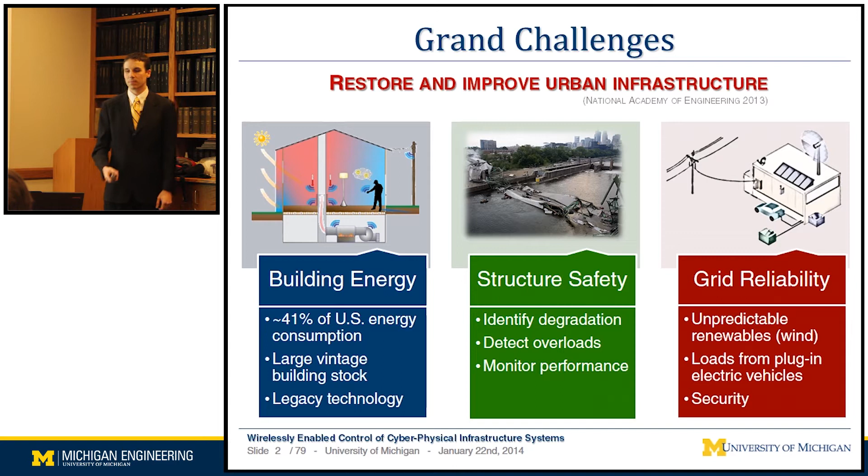One way we can tackle these problems is through enabling technology on three different fronts, all of which are exhibiting some sort of Moore's law behavior—rapid or exponential improvement in metrics with respect to these technologies. In wireless networking, it enables a flexible topology that we can communicate in a very flexible way, and the main improvements have been in creating low-power devices.

And they can fit in small integrated circuits, so we can drive the communication as low down into the physical system as possible. With respect to embedded computing, main improvements have been in creating low-power real-time computing devices that are fitting very small, so we can fit entire systems on a single integrated circuit.

Then lastly, there's two fronts in portable energy. There's energy harvesting with respect to solar and vibration, where we're seeing dramatic efficiency improvements. And especially with respect to batteries in energy storage, we're seeing very impressive improvements in energy density by other researchers that are coming to commercial viability.

So how do we apply these enabling technology trends to the grand challenges? Wireless networking enables us to track people throughout a building and create personalized environments, so we're creating an efficient control system right around the person. That requires advanced controls that really leverage the embedded computing. And then lastly, with portable energy, we can increase the sustainability and put dense sensor distribution throughout the entire building.

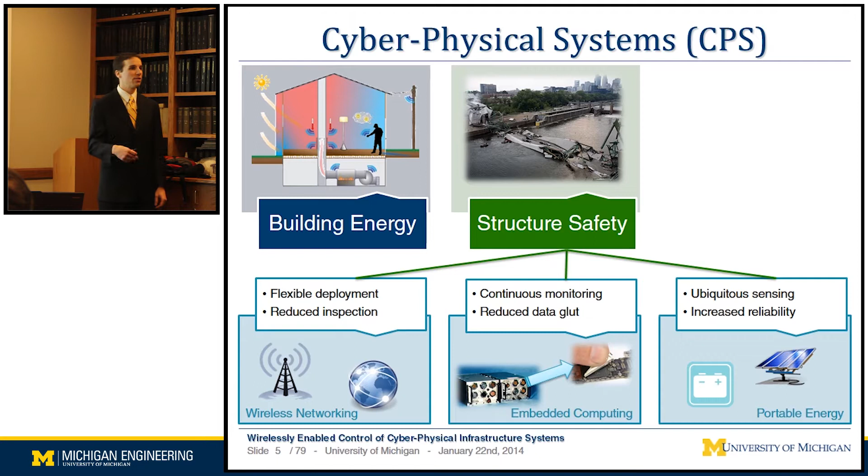With respect to structural safety, wireless networking allows us to put sensors pretty much anywhere, and we can even track mobile loads. With respect to embedded computing, we can do in-network data processing, so only the processed data comes back to us, really reducing the amount of data we have to process in centralized systems. And improvements in energy harvesting, especially here at the University of Michigan, we've recently seen vibration energy harvesters that enable wireless sensors out into the field for long periods of time.

And then with respect to grid reliability, once again, we can track mobile loads with wireless networking. The embedded computing enables us to have decentralized load control, like smart refrigerators, and use predictive control distributed throughout the electrical grid. And with respect to portable energy, we see grid balancing with respect to batteries and increased sustainability with solar panels and renewables.

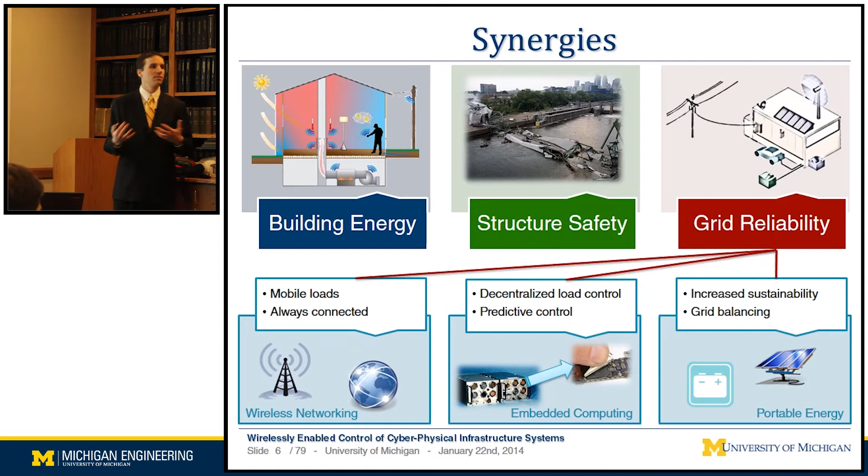So you see a bunch of physical systems that are highly interconnected multi-physics systems with complex interconnected new technologies. These all fall under the realm of cyber-physical systems, where we have a synergy between a physical system. So we have some complex physical system, or even systems of systems with a hierarchical structure.

Those are connected through some sort of boundary between the physical layer and the cyber layer. So we have sensors and actuators coming to this boundary point. Traditionally, we would have some sort of tethered system that comes to separate controllers for system 1, 2, and 3. These controllers then allow feedback loops to improve the performance or get our objective in these physical systems.

And then we can have a back end here with cloud computing, user interfaces, and kind of back end or front end stuff on the cyber side. But the future of cyber-physical systems, and what my research really hopes to do, is to drive the computing down as close to these nodes as possible.

So here you see centralized memory and processing. And then we take each one of those memory and processing units - we have the same amount of computational capability, but it's now distributed across the network and driven as close as possible to physical systems. And that leaves this whole area open for what cyber modules we embed into these computational components.

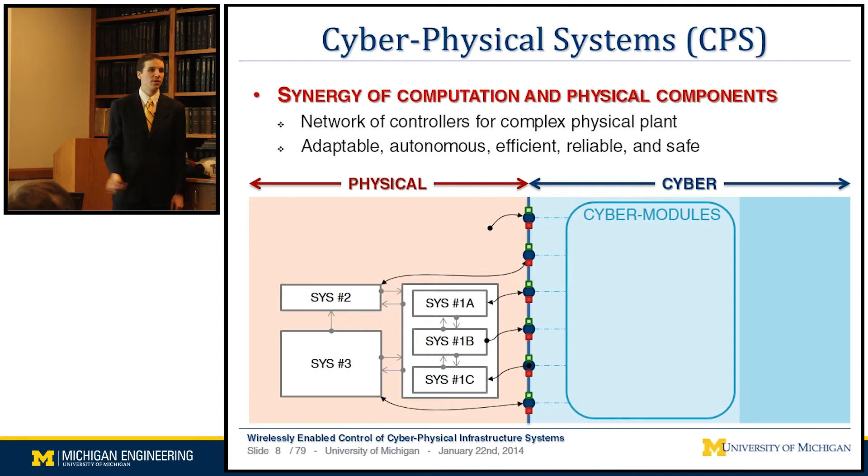So the first goal of my research was to develop a platform for these that enables these nodes to communicate amongst each other. The current market does not have such a platform, not even for researchers. The second is to develop the first cyber module here for controlling a certain class of nonlinear systems, and that's a bilinear system that I'll explain a little bit later.

So this is just a localized controller. But then how do we distribute this controller for even more complex networked hybrid systems that we see a lot in infrastructure? All of this is going to be motivated and applied by a problem with the US Navy, where they have a new initiative of the integrated all-electric ship. So we have a very highly interconnected plant that's on board one of these Navy ships. But it's also analogous to a lot of the other problems that we see in civil engineering.

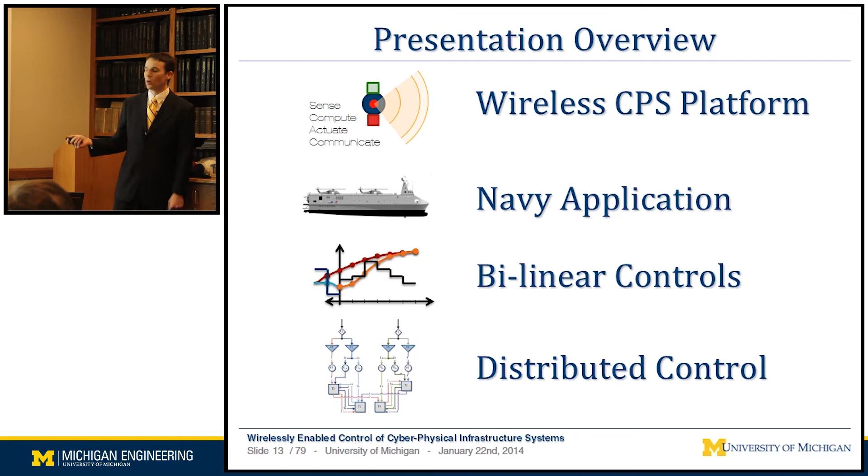So a quick overview of the presentation. First, I'll cover the Wireless Cyber-Physical Systems platform that I led the development of, give a little bit of the motivation with the US Navy application, talk about local bilinear controls, and then extend that to distributed control systems.

So the first research goal is a wireless cyber-physical system platform. We need something that can really drive the computing down as close to the physical system as possible and has adequate communication between each node.

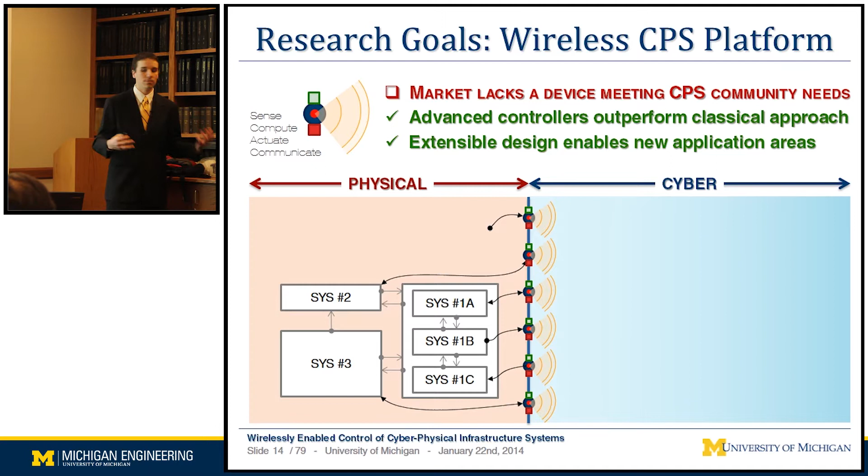Why wireless communication? It lowers costs because we don't have the manual labor associated with installing wires, especially for large-scale systems, so it brings scalability. Here we see a schematic of a centralized system abstracted into a distributed system, where we have the same amount of computational power, but now we have resilience because we don't have a centralized point of failure. The military is really interested in that aspect of it. And we have mobility too, so we can track both mobile and stationary systems.

In the state-of-the-art of wireless cyber-physical systems, we have three thrusts. The first is wireless sensing, where the main research areas are ease of use and power management. The second is leveraging embedded computing to process the data in network, with research on heterogeneous distributed low bandwidth algorithms. And lastly, using that processing power in a closed loop to create a feedback control system, where the open research areas are performance and scalability.

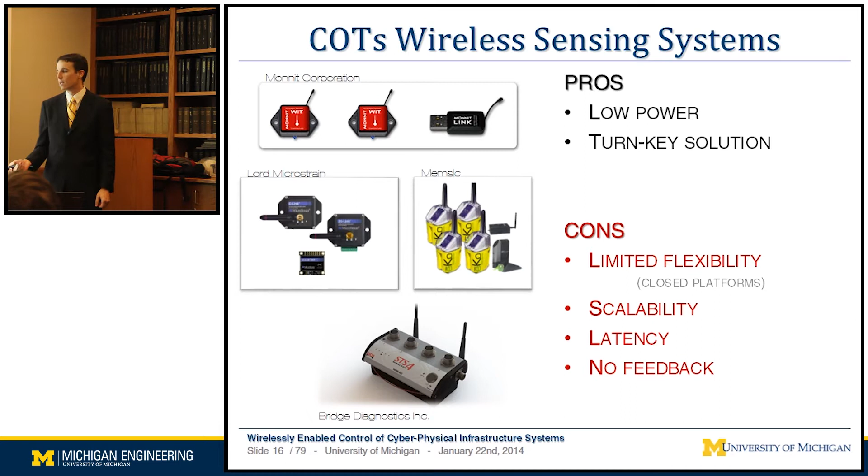There are some devices on the market. Here we see commercial off-the-shelf wireless sensing devices from a handful of companies. They're low power, easy to use, and can be deployed by a civil engineer—simply go out in the field, put the sensors where you need them, and you get the data you need. But some drawbacks: they're closed platforms with limited flexibility, pretty application specific, not massively scalable, and have fairly high latency from when sensor data is taken in the field to when it's returned to your centralized processing repository. Because of that latency, they really don't have the option for feedback or feedback control.

To overcome some of these challenges, researchers have developed platforms used in civil engineering. The iMote2 is a fairly computationally powerful device, running at a couple hundred megahertz. At UIUC, they've developed a structural health monitoring board to measure responses of bridges. But one drawback is it uses an obscure operating system that's not real time, so it's difficult to control fast systems, and it uses a non-standard programming language within that operating system.

Other researchers, like here at the University of Michigan, use the Narada a lot, which is an 8-bit microcontroller with minimal computing power. We've seen some interesting things out of Los Alamos National Lab sensing ultrasonics, which has introduced some new areas. There are even some commercial open devices for developing your own wireless sensing platform, but once again they have relatively low computing power.

There is an area of commercial wireless control devices, standardized as ISA 100 and commercialized as Wireless HART. HART is an industrial control standard for wired control systems, and they extended it so you could have a heterogeneous network combining your wired industrial control system with wireless sensors. It's very robust, using mesh communication, except there's significant latency that makes feedback control relatively difficult for quick processes, besides slow thermal chemical processes. It's also really difficult to leverage the embedded computing within these nodes—the manufacturers actually recommend you don't develop custom hardware for these devices.

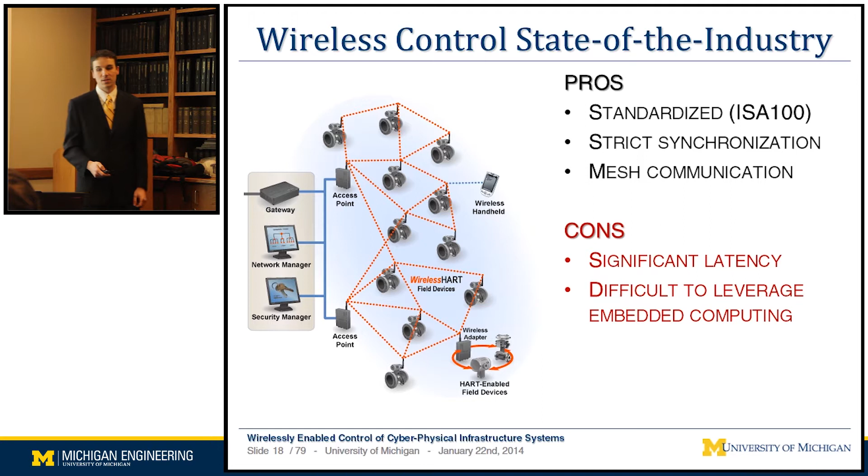So we can combine all of those cons we saw earlier into needs that the wireless cyber-physical systems community requires. The reason we need these is because we're limited without them—we're unable to control nonlinear plants in an autonomous manner, especially for large-scale civil infrastructure. We need something that can respond quickly to mitigate the effects of cascading failure and be able to stabilize systems that could potentially have thermal runaways. We also need something that can be implemented by civil engineers with a relatively low learning curve in order to reduce implementation costs.

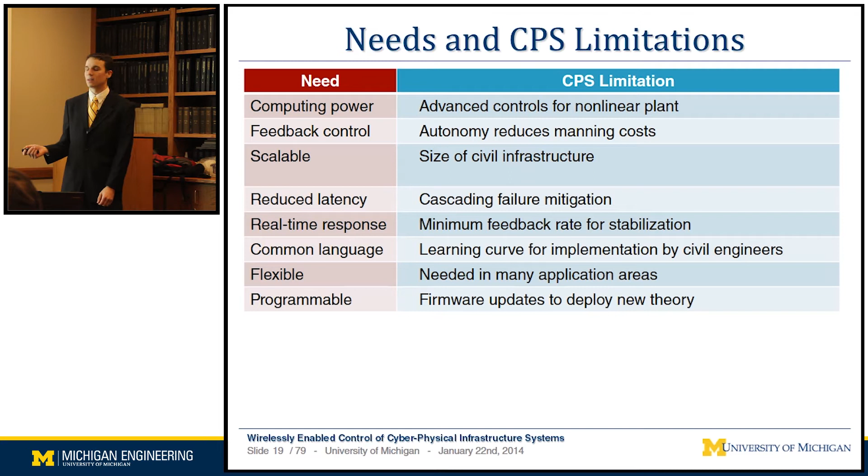Civil engineering is a very cost-oriented area. And lastly, we need something that's flexible, can be applied to many different application areas, and something that can be easily programmed even out in the field.

So how do you design a new wireless node for cyber-physical systems? Well, there are two main things you need to consider. One is what sort of wireless protocol you use, and the other is what sort of computing you use.

You're probably pretty familiar with 3G and LTE on your cell phone. You probably have Wi-Fi in your laptop that works pretty well throughout your house, and you probably have Bluetooth on your microphone in your car. But there might be something you're not aware of called Zigbee.

It's similar to Bluetooth. It uses the same radio frequencies, except it's ultra low power, so we lose a little bit of bandwidth. The range scale is only about the size of a room, maybe a building. We have gotten kilometer-scale distances, but that's for big open air between bridge towers.

But we can use a mesh networking protocol where we communicate from one node to the next, because the nodes will always be kind of within the scale of a room together. We can communicate over a large-scale system just by neighbor-to-neighbor communication. So this Zigbee is what I decided to embed into this new wireless device.

With respect to computing, the Narada and many of the other wireless sensors on the market use 8-bit microcontrollers. The iMote used a 32-bit microcontroller, almost like a single-board computer, but more of a cell phone chip, so there's kind of an area between. And obviously we're not going to embed multi-core servers into each of these nodes.

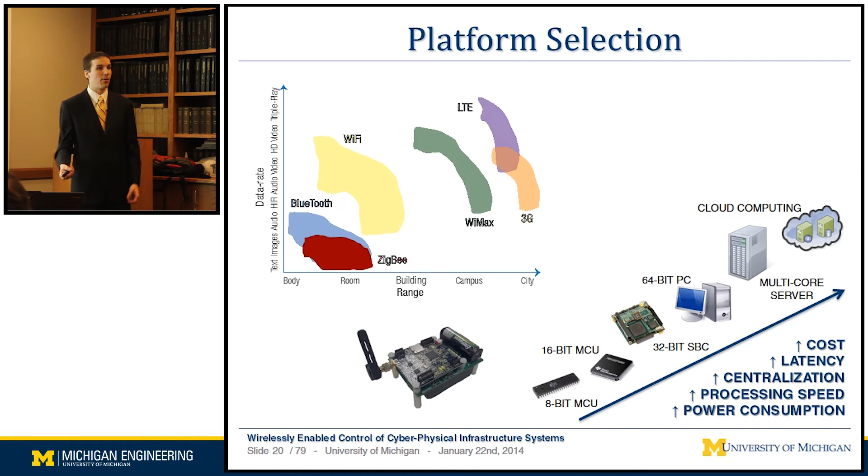So we need some sort of balance between all of these things that improve or increase as you go out this way. I found a nice balance in this 16-bit microcontroller from Texas Instruments that can handle floating point calculations and has relatively good power numbers, so we can have battery-powered operation under certain circumstances.

So this all kind of came together into the Martlet wireless device, which is what I've led the development of. It's able to meet the needs of the wireless cyber-physical systems community.

It has a dual-core 16-bit microcontroller. The first core has a typical pipeline processor with a floating point unit. The second core is a floating point control law accelerator, meant for local control loops. So we can have local control loops in the secondary core, and distributed algorithms running in the primary core. I've reduced latency through designing a very light RF stack.

It doesn't have an operating system. It just runs on a state machine, so we have very little overhead on the software side, allowing us to service interrupts relatively quickly. The programming language is C99 compliant, which civil engineers are becoming more and more familiar with.

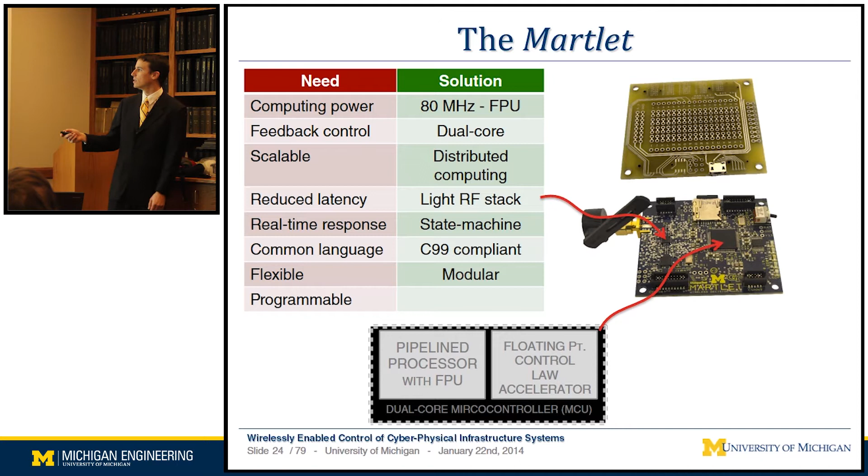The hardware architecture is extensible. We can plug custom boards into these 4 connectors at the top. It has a 16 gigabyte SD card, so we can store a lot of data on the node before it's relayed back.

And then it's easily programmable. All you have to do is plug this board into the bottom and plug your micro USB connector into your laptop, and it's just like developing C code on your laptop. So like I said, it's a very extensible platform.

Over the last 2 years since it was originally developed, we've created a lot of what we're calling Martlet Wings, or extension boards that we can plug on top. We have battery boards that can do battery charging, prototyping boards with a nice little breadboard, and some application-specific ones where we have smart anti-aliasing filters that can change the gain and bandwidth.

We can measure acceleration, temperature. We can control pumps, valves, motors. We can do environment monitoring. And at Georgia Tech, we have collaborators working on ultrasonic capabilities on this board.

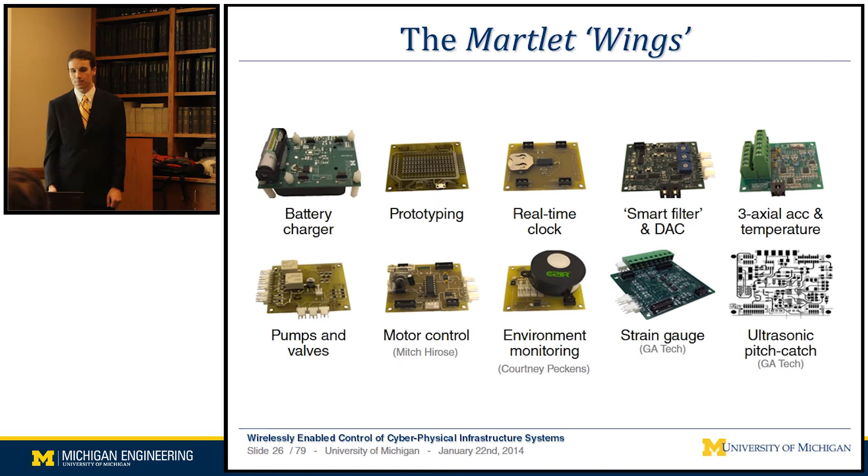But with all of these boards, we need some application area to test them. The very first place the Martlet was tested in a field-like condition was at Los Alamos National Labs, in the harsh conditions of the New Mexico desert, on this 12-meter tall wind turbine tower.

We wanted to monitor the performance of this tower. So because of the harsh conditions, we embedded a Martlet, an anti-aliasing filter, and a triaxial accelerometer inside one of these weatherproof boxes, and mounted 6 of them on this wind turbine.

The goals of this testing were mainly field validation of the Martlet, but more specifically, 2-axis acceleration at a fairly high sampling rate for a wireless device and for multi-day testing. The reason we're sampling so high is because the turbine can spin at up to 500 RPM, which is pretty fast for something that big to be spinning around.

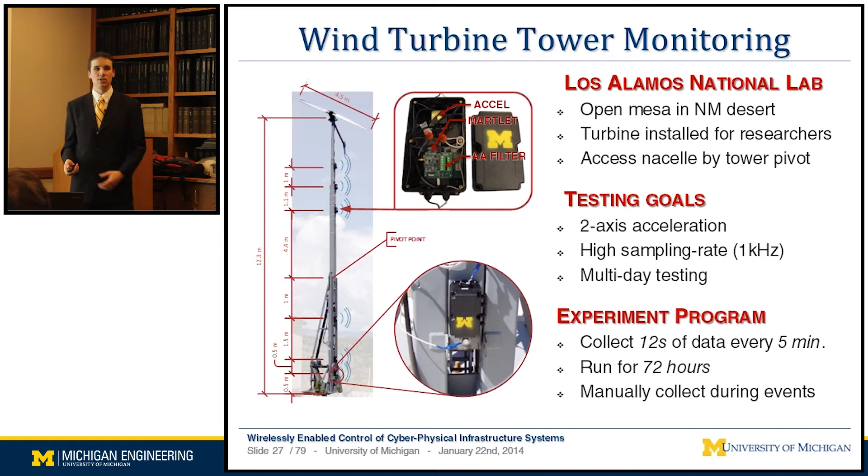The experimental program is to collect 12 seconds worth of data every 5 minutes over a 3-day period. We can also manually control the server to get data at interesting environmental events, such as

when we ramp the speed up or when we apply a brake to the turbine to ramp it back down. So here we see some time histories of the data, where you see at the base relatively low vibration, relatively high vibration on this side. So the wind is blowing in the X direction, but you see vibration back and forth in the Z direction at the top of the tower due to the imbalance in the rotating machinery at the top of the wind turbine tower. If we look at this in the frequency domain, we see this in the time history, and

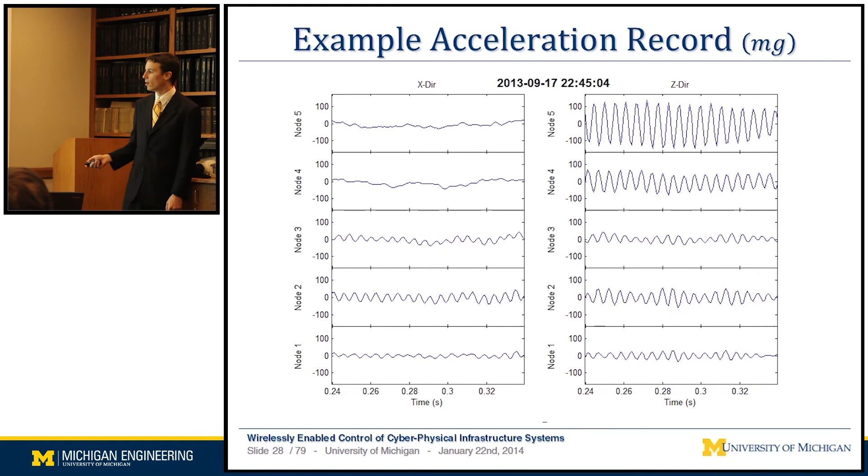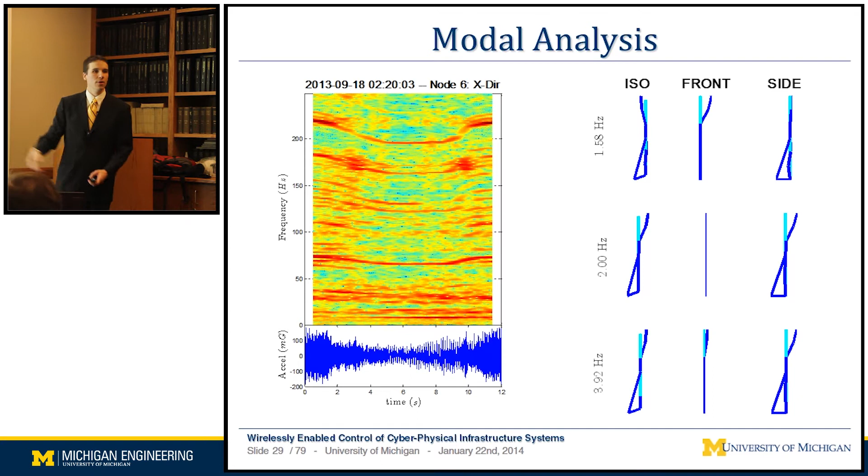Where this comes from is the wind is normally blowing from the north-northeast. So we're mainly exciting the east-west direction due to the rotating machinery, but because the wind is a little bit askew of the structure, we're actually exciting this a little. So we actually see another mode due to the vibration of the system due to the rotating machinery at the top.

With respect to long-term trends, this is a long-term periodogram where we took from 0 to 10 hertz, starting September 16th, going all the way to September 18th, and comparing that to weather data. So we see the 1.5 and 2 hertz peaks in our frequency, but we see here changes in this frequency here, which are highly correlated to the wind.

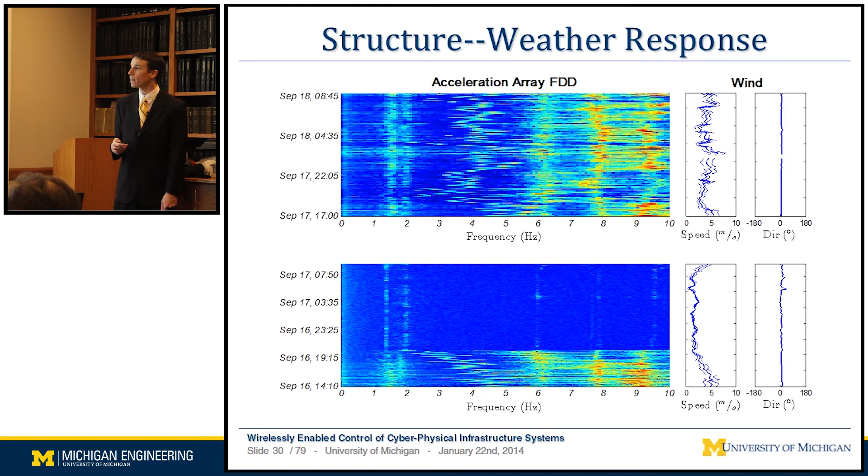So that, once again, tells us that this is an operational mode shape that is correlated to the wind speed, which is also correlated to the blade speed. We really would have liked to measure blade speed, but it just wasn't possible. So this is just one application area of many that the Martlet could be applied to.

In the second area where it was applied with the help of Mitch Hirose for a collaborative project here, an experiment was designed to study the diffusion of CO2 gas in an enclosed room. So if you have a single person breathing in the middle of an enclosed room, how does that CO2 gas diffuse? That model was going to be used for later HVAC system design.

So instead of just having a person sit in a room for hours on end, completely sealed off, we created an analog of human breath, where we have a tank of 5% CO2 gas in air and bubble it through water that's at 100 degrees F, and then it comes out as a 100% humidity gas that has a constant CO2 concentration of human breath.

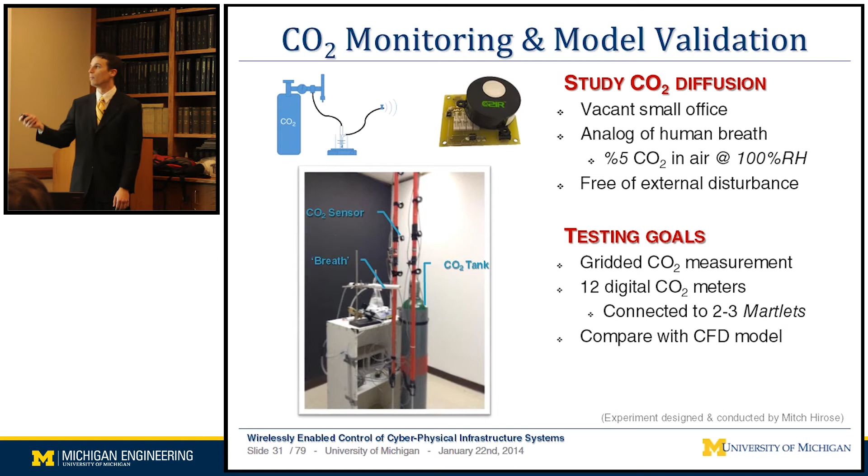So this is being pumped into this closed-off room, and then we have 2 columns that have CO2 sensors on them. We have 12 CO2 sensors in 2 different columns, and there's 3 Martlets. So we're actually multiplexing these CO2 sensors on each individual Martlet using this interface board designed here.

To summarize the developments of the Martlet: I led the creation of this device in collaboration with a couple other universities, creating a device that really meets the needs of the wireless cyber-physical systems community. I validated its reliability and platform extensibility on two different test beds, but none of these test beds have fully utilized the feedback control capabilities, the ad hoc communication, or the dual core processing, which are all core focuses of this thesis.

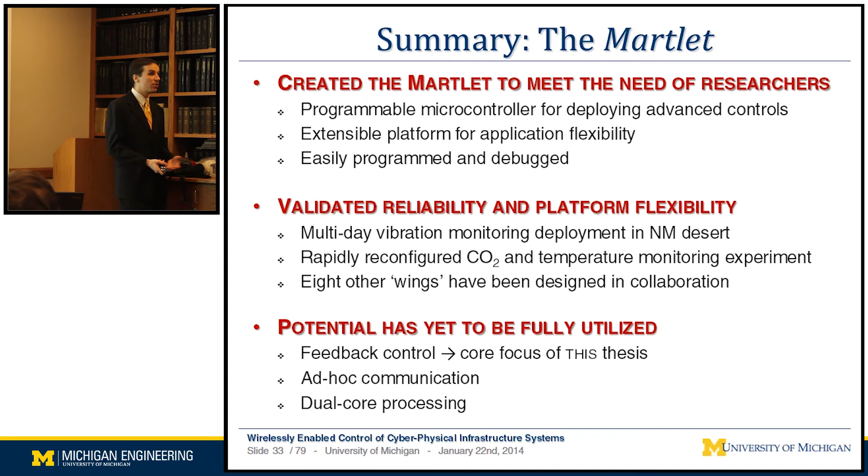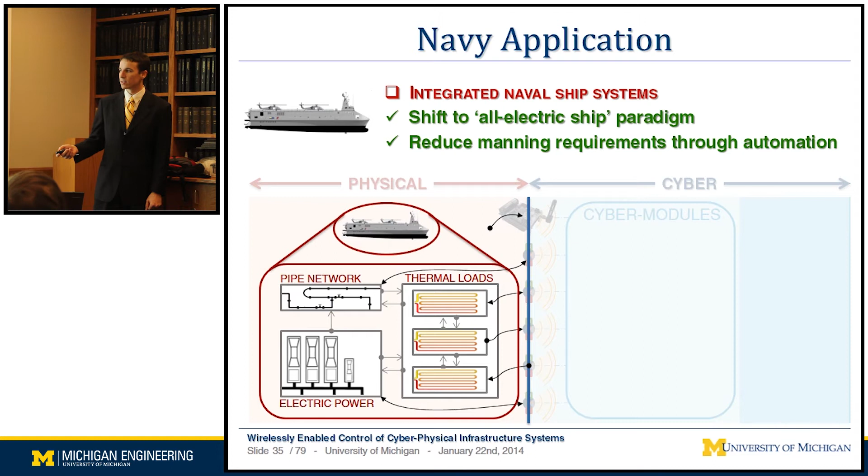So we need some sort of application to motivate a really challenging problem to apply this wireless device. I found that in this US Navy initiative for the all-electric integrated ship. This is once again a system of systems, but more specifically we see an electric power system, a pipe network system pumping water throughout the ship, and multiple thermal loads that need to be cooled. These thermal loads can be computers, HVAC systems, or laser weapon systems.

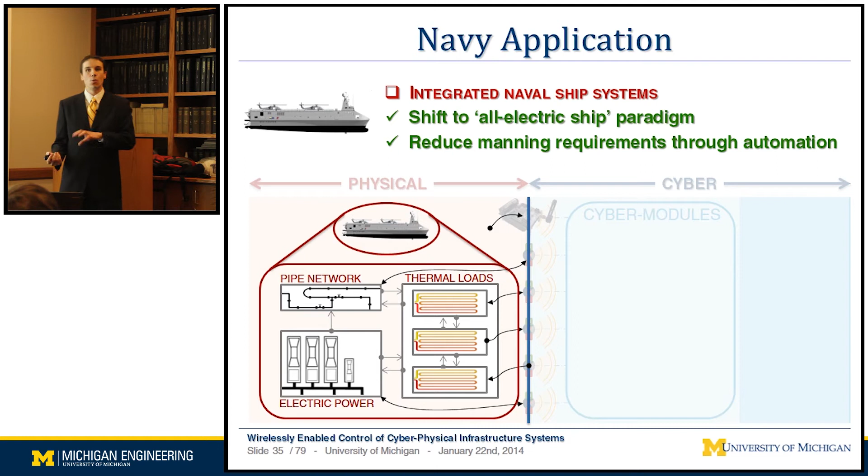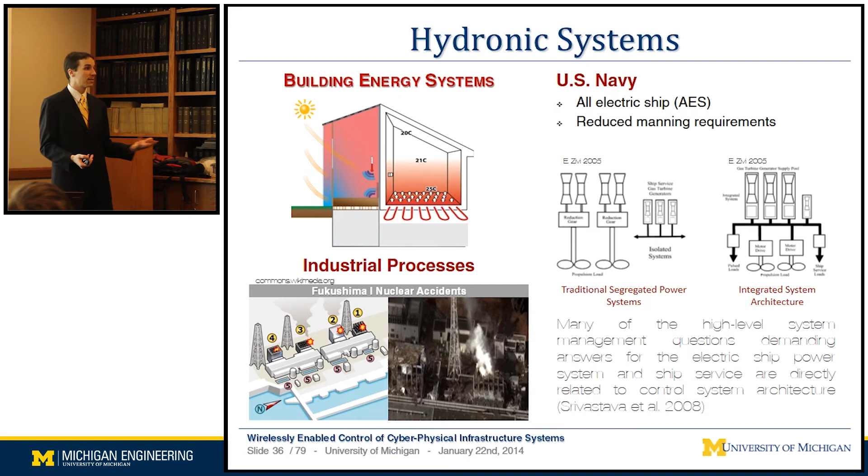Here we see a water network and a heater network, and that's called a hydronic system, where we're using water to transfer thermal energy. So what is a hydronic system? We see it in a lot of different application areas besides the Navy: in building systems and radiant floor, and in commercial or industrial processes, such as power plants, where they act as a safety critical feature of cooling loads. Here they're meant for cooling, here they're meant for heating.

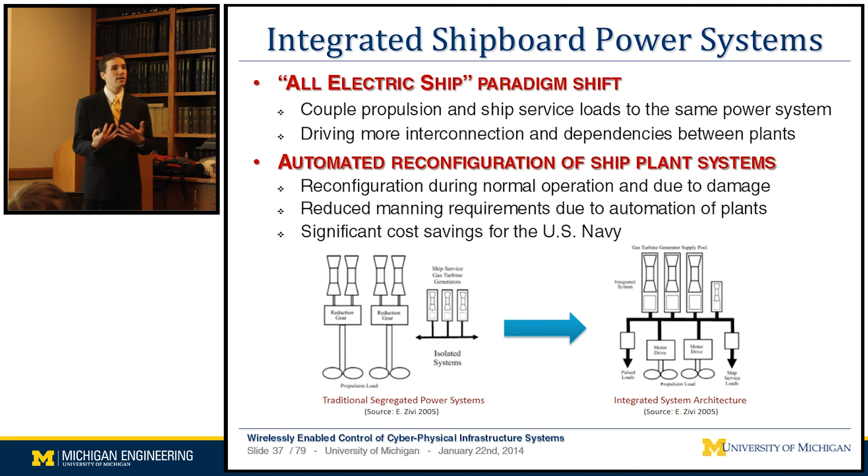Going back to the Navy application, it all stems from the integration of the traditional sense, where you have a propulsion system and an electrical system, and those two are isolated. That was originally designed to be redundant, so one could fail without causing the other to fail. But with the budget crunches we're facing lately, the Navy is interested in reducing costs through automation and combining systems together. So here you see a redundant electrical system and a redundant propulsion system, and the ship service loads. But now this is all highly interconnected, and we need some sort of controller that can handle this interconnection and prevent cascading failures. That's where this cyber-physical systems paradigm really is a good approach.

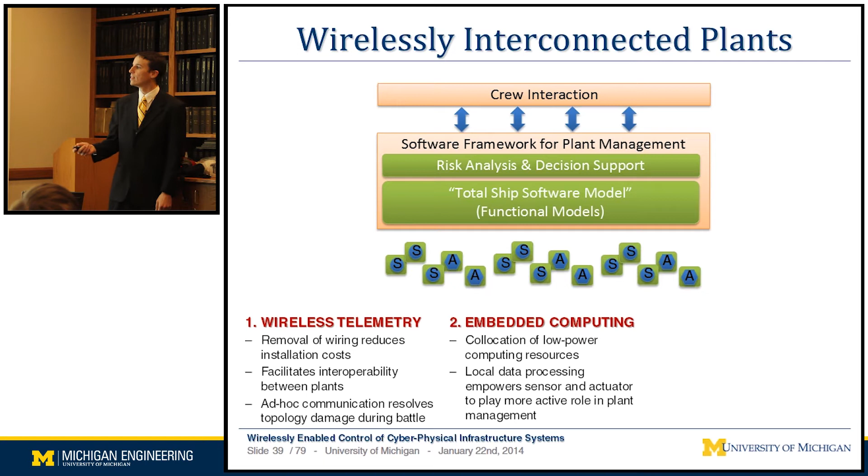So we have multiple plants. We install some sort of software framework on top of this, and then we have sensors and actuators. What my research really hopes to do is first introduce wireless telemetry, so we can have wireless sensors and actuators throughout the entire system, utilize the embedded computing on each device, and then tie them all together in some sort of computational cloud that interconnects the computational side with the physical side, creating a cyber-physical system.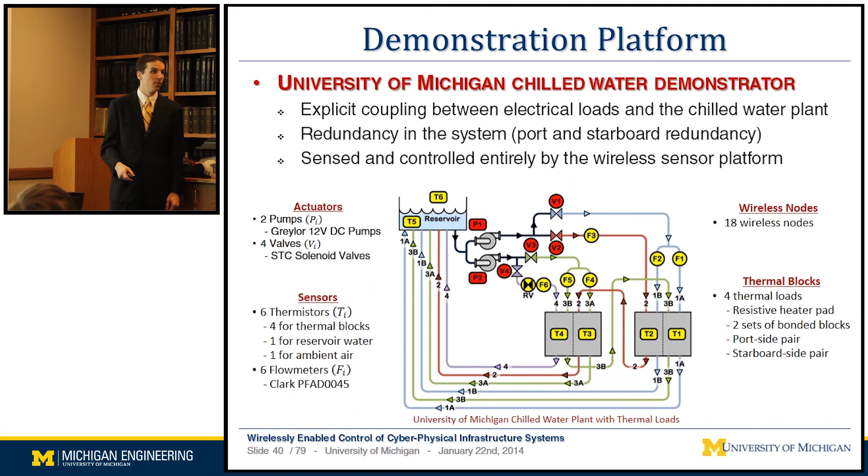This is a picture of the test bed. You see the two pumps, the four valves, the thermal loads, and these temperature sensors, some flow meters, which are all then going to a wireless sensor.

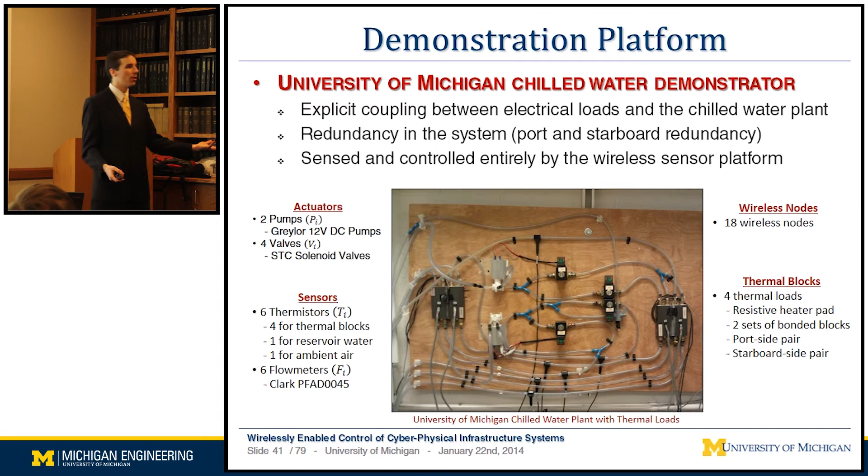To summarize this platform and this motivating example: we found a good motivating cyber-physical system example in the initiative for the all-electric ship. I've created a test bed for wireless cyber-physical systems that naturally decomposes and has all of the required aspects that we need. So what's ahead, both in research and in this presentation?

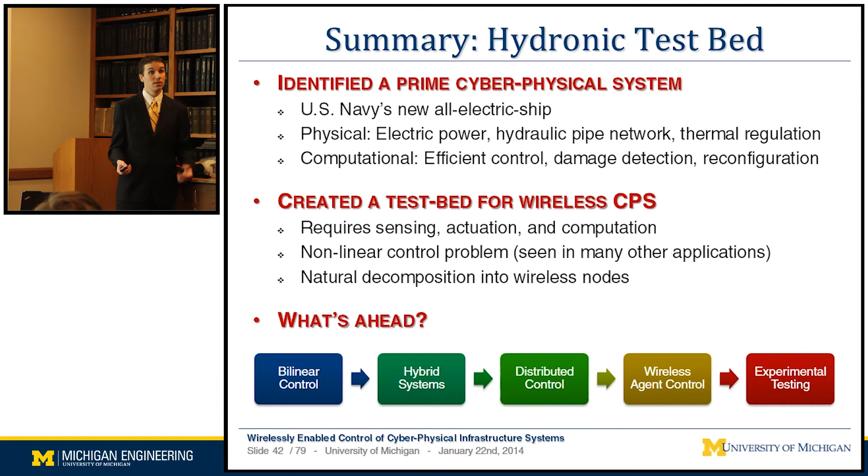A local bilinear controller was first developed and then combined with hybrid systems and distributed control theory to create a wireless agent-based control system, which was then tested experimentally. So the first goal is to create a bilinear control system.

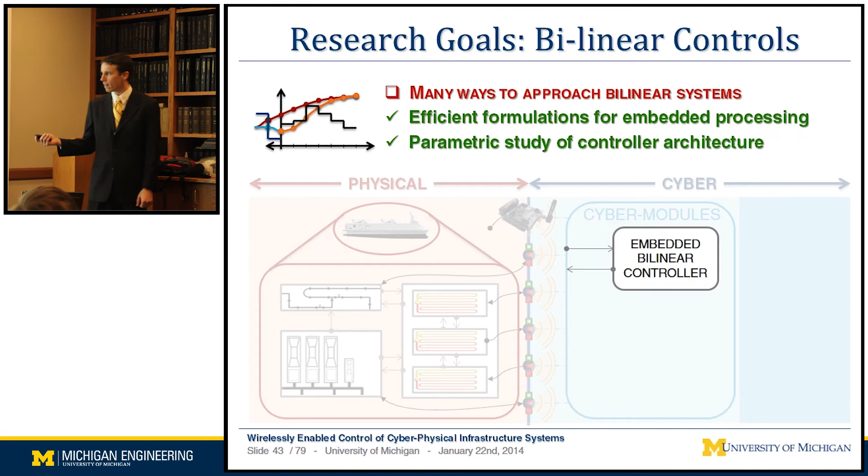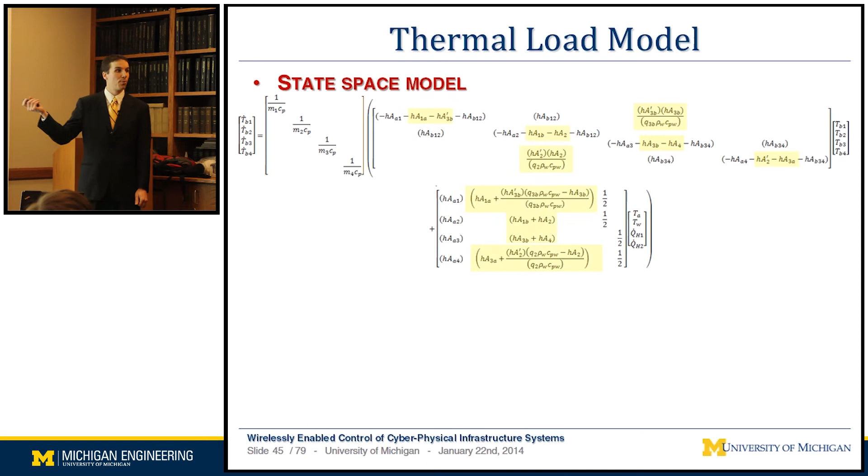What we're doing is trying to control flow rate, but you don't really see that because flow rate is analogous to these heat transfer coefficients. So what we're actually controlling are the parameters within our state space matrices. This is called a bilinear dynamical system, or a dynamical control system.

It was initially introduced in the 1970s, but has seen more use with a comprehensive work by Elliot in 2009. It's a special class of nonlinear systems that can be decomposed into a differential equation where the state is multiplied by the control. We see this in chemical, mechanical, electrical engineering applications, along with other biological processes.

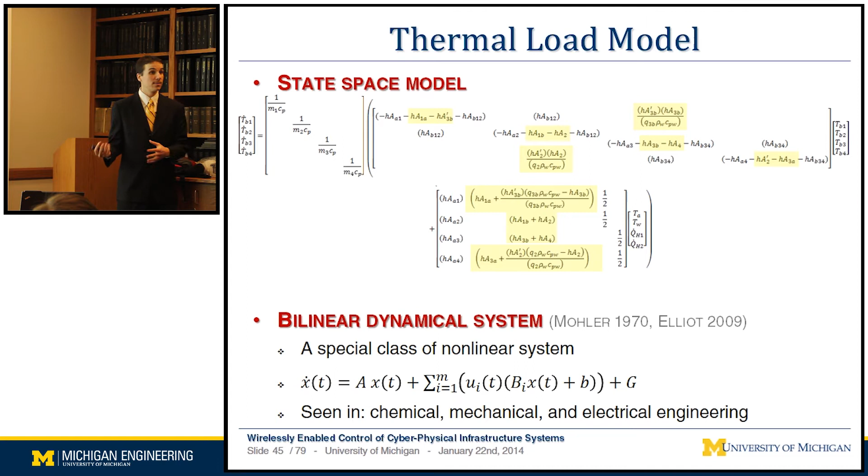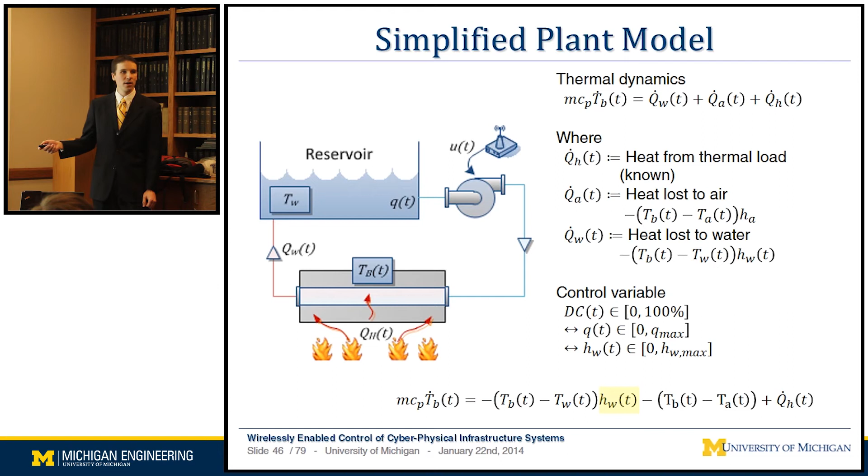This heat transfer coefficient can be algebraically related to our flow rate, which can be algebraically related to our duty cycle, which then sets the pump speed. So, how do we model this system in a way that's useful for control and analysis? There are two different approaches.

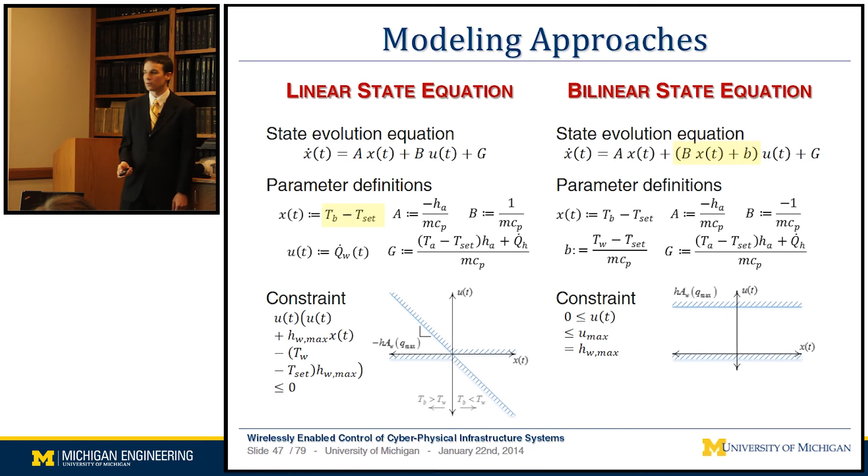The other approach is to make a more complex differential equation by multiplying our state by our control. But we end up with a nice rectangular constraint that's time invariant, which I had an intuition would make the optimization problem easier, according to some assumptions of the iterative optimization process used to develop a controller. But how do you develop a controller? There are multiple approaches you could take.

I decided on a model predictive controller because it directly handles the constraints of the control system, and it can adaptively change to changes in estimated disturbances, to changes in models.

So what is model predictive control? Well, what it's trying to do is develop an open loop control sequence, or a schedule of what the controller will do from this point forward. So in 2 minutes, we'll turn the pump on, and then in 2 minutes, we'll turn the pump off.

So here we see a little schematic. We have our reference trajectory, our measured output, and our control. If we just estimate that into the future, our predicted control is just constant from what we currently had, we can predict or create an estimate of this is what would happen. This would be our predicted output of our system. According to some cost function, we would have a cost of 1,000.

We can optimize this controller to try to drive it a little bit closer to our reference trajectory, so we have a little bit more. So we've optimized our control trajectory to drive our cost down, and we can do that again to drive our cost down even more. Once we drive this down to as low as possible, we wait for this time period to elapse, apply that very first step, and then redo this whole process. So this whole process is just happening at fixed time constants, or at fixed periods in time.

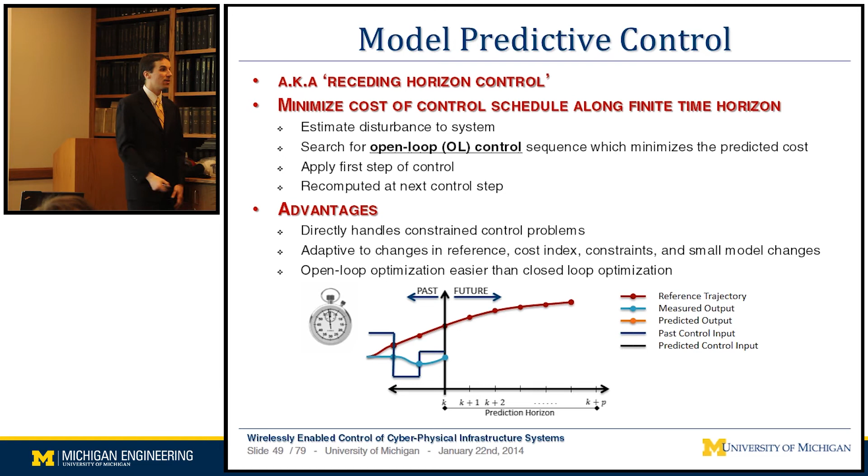But what is that control objective that we're trying to do? What are we mathematically trying to reduce? So I've looked at 3 different areas, and this is part of a parametric study between the multiple modeling approaches and the multiple objective functions that I undertook as part of this thesis work.

The first objective is a minimum time objective, where whenever the temperature is above the set point, we want to drive it to that set point as quickly as possible.

The second objective is a quadratic objective, which you see a lot in control literature, where you have a quadratic cost on your state and a quadratic cost on your control, which leads to a convex objective function for certain assumptions on Q and R, but the resulting optimization problem won't necessarily be convex.

So first we'll look at that quadratic cost with a linear system model. So you have this dynamic model. You have this constraint, which is visualized here.

You have some sort of objective function, which can be in the form of a convex kind of surface like this. But then you have this constraint according to that dynamics here and according to this constraint on control, which can lead to a non-convex constraint where we might end up at maybe some sort of local minima instead of at the global minima that we would actually want.

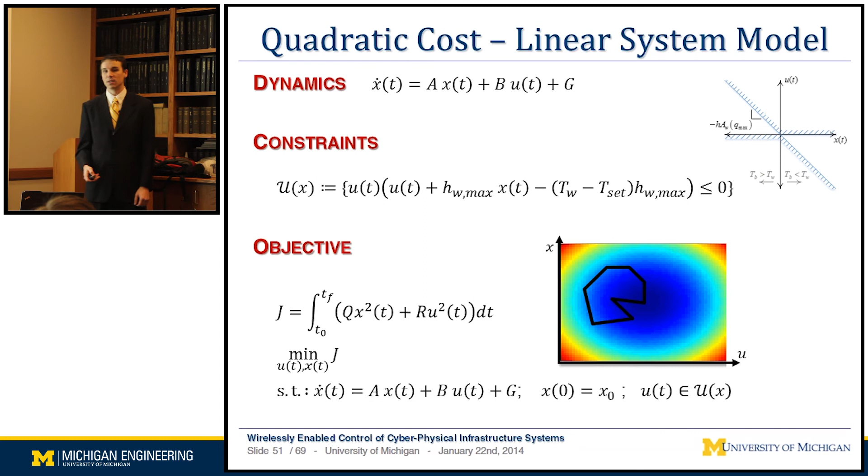So we've taken this objective, it can be augmented. So we take the dynamics here and augment them with a second set of dynamics. And that second set of dynamics allows us to make the minimization problem easier. So this is the co-state, and then we have the state dynamics here.

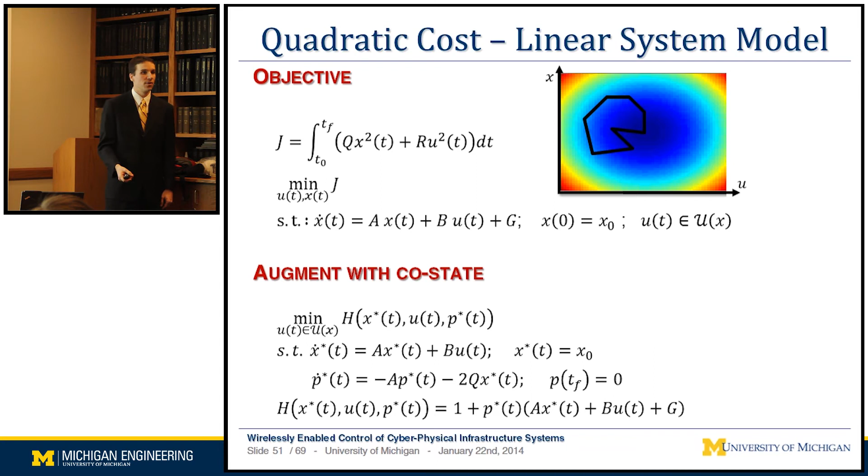And this minimization problem is now with respect to H as opposed to J. J has this integral here, while H is independent of that integral. So if we change U at one period, we don't have to worry about changing the effect of our control at another period. So it makes that optimization a lot easier.

And this leads to the 2-point boundary value problem, where the solution meets the necessary conditions for optimal control. So the 2-point boundary value problem is we have our forward state dynamics, so we have some sort of initial state, the temperature that we're at now. We have our reverse co-state dynamics with some sort of final co-state, which is 0 in this case. And we want to forward integrate this, and we want to reverse integrate this, except you see that there's coupling in between these, and especially coupling between the feedback law.

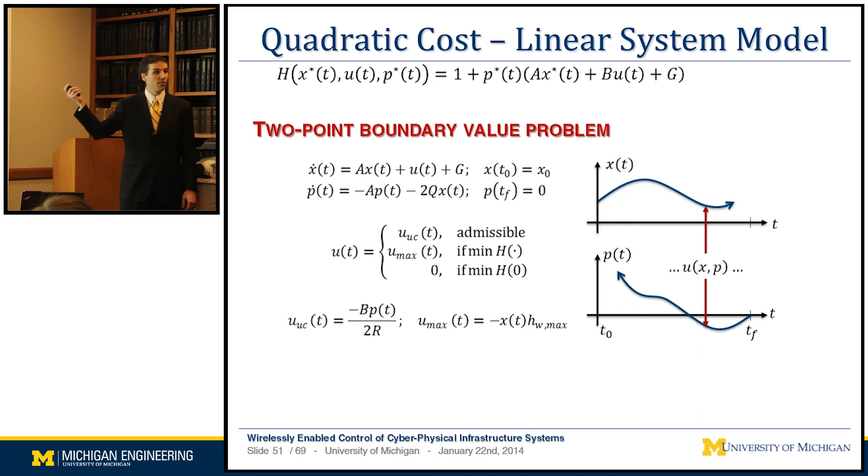So we need some way to do this, because we don't know what P is here, so we can't forward integrate this. We have to do some sort of iterative estimated process. This is for the linear system model of the quadratic objective function.

If we look at the bilinear model, we have the bilinear state equation, and we have the very nice rectangular constraint on our control. We have the same objective function, except now U has a different physical meaning. Before, in the linear system, U was the rate of heat being removed from the system, while here U is the heat transfer coefficient, which is much more analogous to our flow, and we're putting the penalty on much more of what we actually want. We end up with a very similar two-point boundary value problem, except we now have a nice feedback law that has constant constraints as opposed to the time-varying constraints.

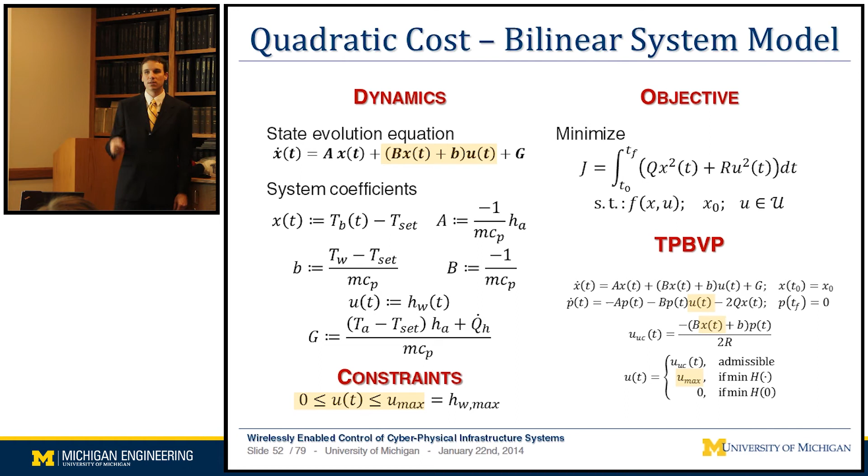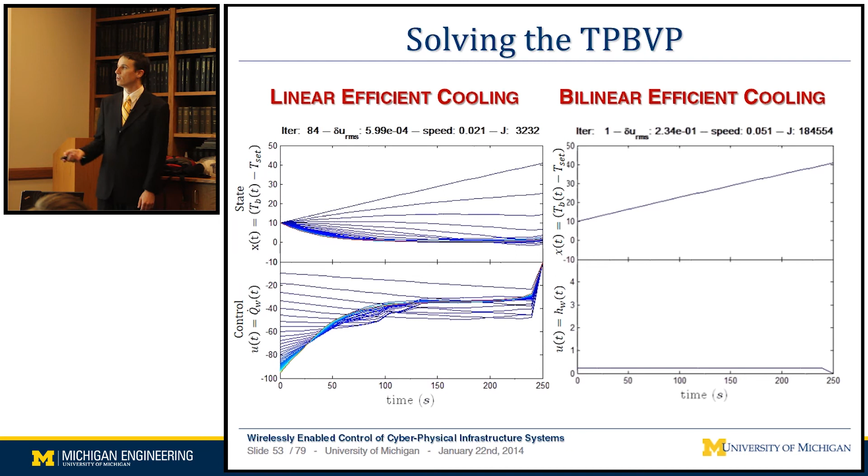So solving these two different two-point boundary value problems, we start out with assuming that the control is 0 over the predicted horizon. Then we forward integrate our state. So if we start at 10 degrees above our set point, and we forward integrate that, we have heat coming into the system which is causing our temperature to rise. So we have an estimate of our control, we have an estimate of our state, so now we can reverse integrate our co-state, and then we can apply the feedback law, multiplying it by some speed, let's say 10%, to try to reach more closely to our optimal control. We iteratively do this process until we eventually converge to some control that meets the necessary conditions for optimality. So this is for the linear case, and then for the bilinear case we see a very nice convergence as opposed to banging around because of the changing constraints.

So this two-point boundary value problem has been analyzed and created for both the quadratic case and the efficient cooling case. The minimum time case is actually much more simple - it just results in a bang-bang controller. Whenever you're above your set point, you just bang your control onto the maximum flow possible, and that will cool your system to the set point as quickly as possible. With the quadratic case, we end up with different solutions for the linear and bilinear formulations because the weighting on the control is different. With the efficient cooling, we end up with a two-point boundary value problem, but instead of an algebraic feedback law, we have to solve a convex program at each step during the optimization. We have the same solution for our linear and bilinear derivations.

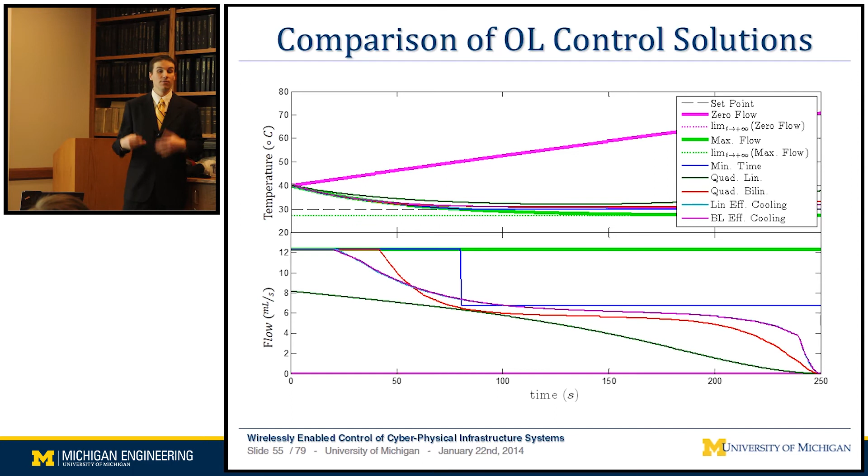So to summarize, minimum time ends up in a bang-bang controller. Quadratic ends up with two different solutions that have different computational complexities, but they're relatively close, where I'm measuring computational complexity in just CPU time on a PC. This computational complexity is important because it's really the constraining factor on implementing this on a low-power wireless node. What I've selected to go forward with is the bilinear efficient cooling. It kind of balances the computational complexity, and we get explicitly the objective function that we want.

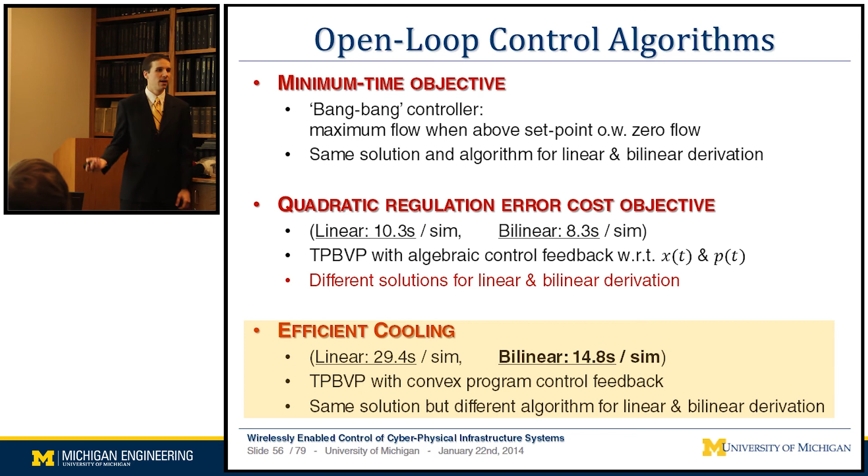And the solutions, I can reliably see that the two solutions converge to the same result. So running an experiment, this was all embedded into a single Martlet. All of that optimization was embedded into the 16-bit microcontroller and run in real time in a model predictive framework.

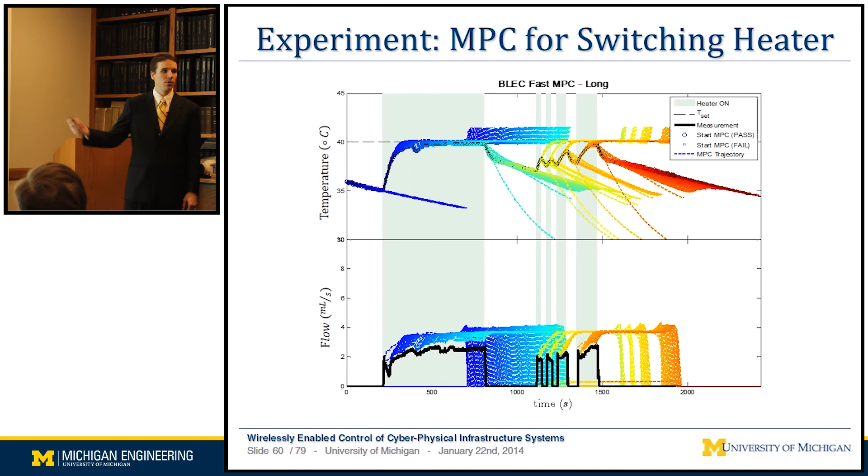We're not quite getting the flow that we want, but this is actually one of the good features of model predictive control, because this is an experimental issue where the model doesn't quite match the physical system, but you can see that we're still receiving the performance that we want because we're constantly updating this open loop control. You can keep on going through, and you see all these open loop MPC trajectories that change every time the system changes because the heater turns on and off.

So summarizing these bilinear model predictive control developments that I've made, I've analyzed multiple approaches to analyzing and controlling bilinear systems, both with linear and bilinear models and multiple objective functions, which are all kind of balanced against the constraints of embedded control systems.

I've embedded this model predictive controller into a Martlet and tested it experimentally. One of the really neat developments here that I haven't seen before is implementing a GNU scientific library into a 16-bit microcontroller to control these infrastructure systems.

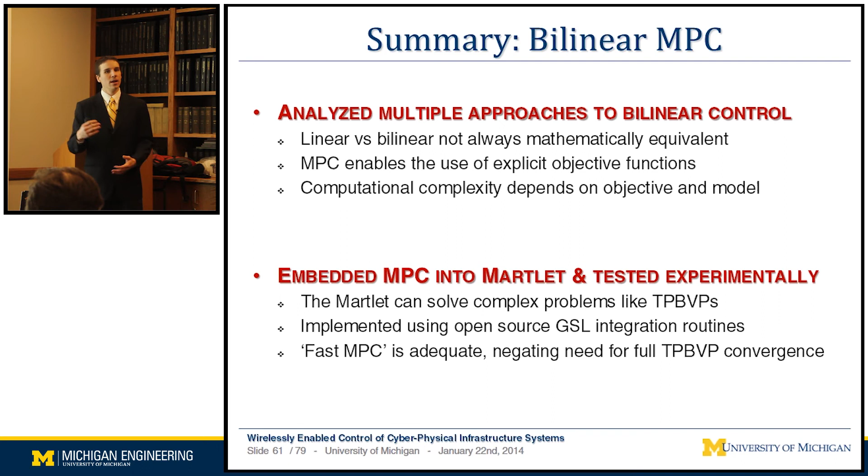And then what I didn't talk about is that it's actually implementing a fast MPC, or fast model predictive controller, where that two-point boundary value problem isn't converging all the way. It only converges until time runs out, and then it updates the system. And it's actually still able to control the system without fully converging.

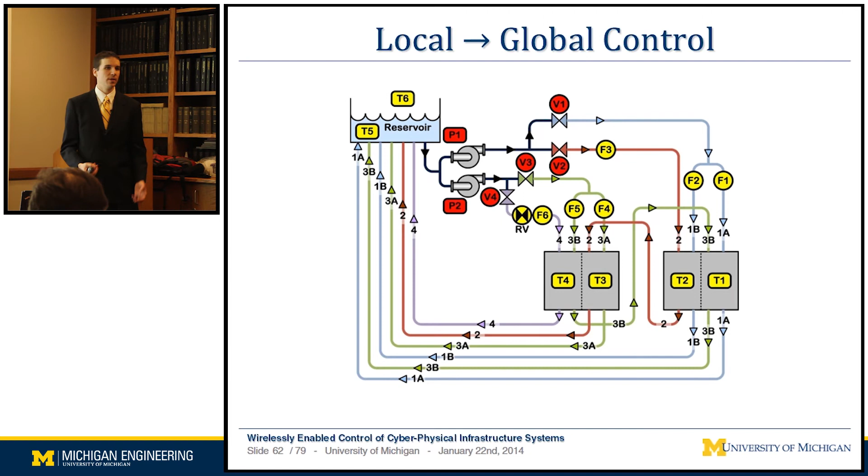So what I just discussed was a very simple controller, one pump, one valve, one block, like this. But I've ignored everything else. So how do I extend this in order to control this entire complex system? That's where distributed controls come in. Centralized systems aren't scalable to the size of civil infrastructure.

So hybrid systems are also a characteristic nonlinearity of these large-scale systems. What are hybrid systems? They're a dynamic system that has continuous inputs and discrete inputs, continuous outputs and discrete outputs, and some sort of dynamical system in between.

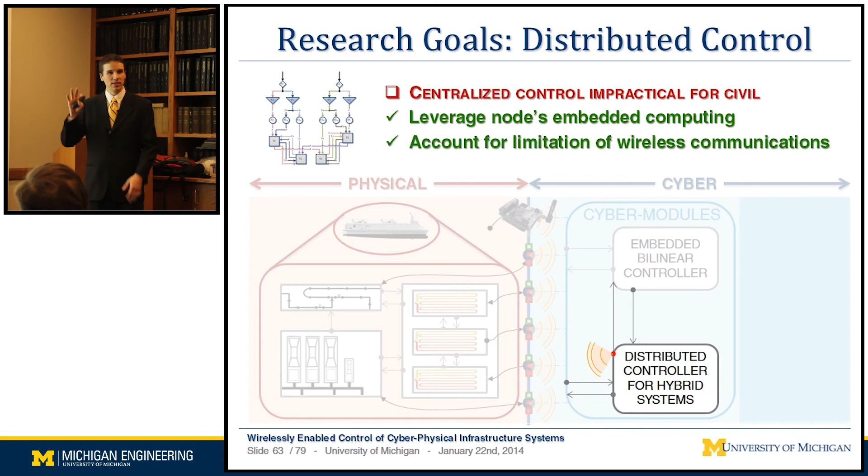So how do you model these systems? If you have a very simple framework that meets the framework of piecewise affine, there's a good mathematical relationship for analyzing these systems.

There's mixed logical dynamical systems, which have plenty of software packages available for analyzing those. But those software packages are meant for multi-core computers, which really aren't applicable to embedded systems. And then there's hybrid automata, which is the modeling approach I've decided to use.

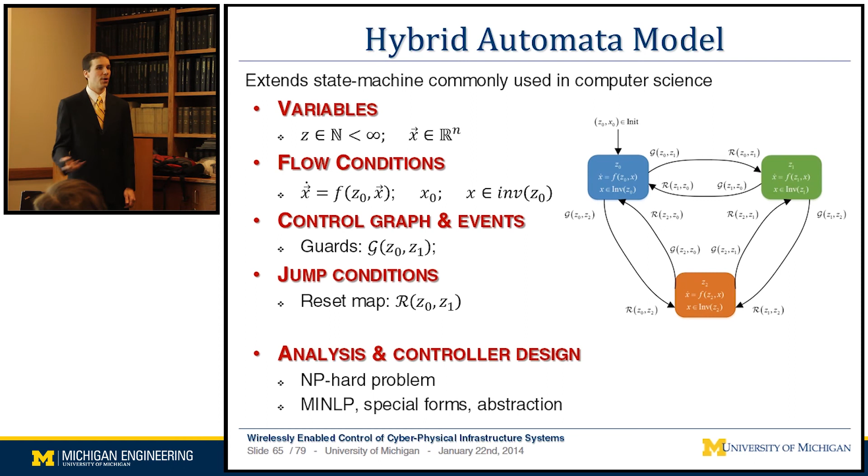So why distributed? Well, we have resiliency because we don't have a centralized point of failure. We can increase response speed because we've embedded that computing as low down into the physical system as possible. And we have increased scalability because we can distribute the system over large physical scales.

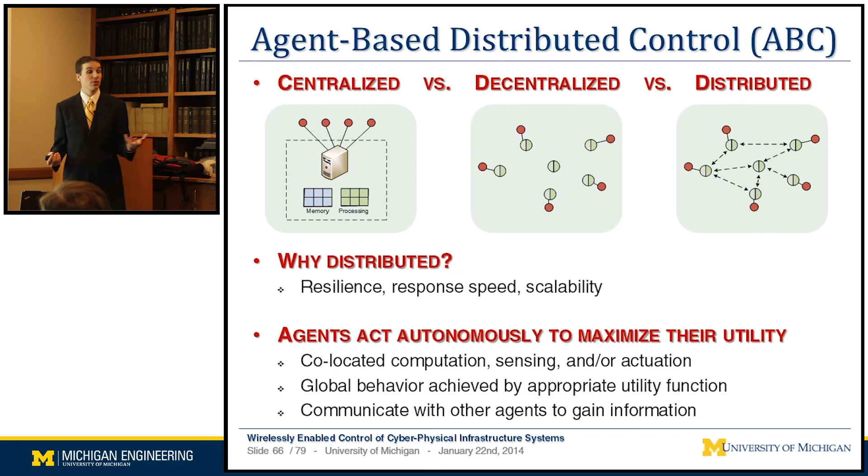If we embed an agent into each one of these nodes — and an agent is something that acts autonomously to maximize its utility — that's where agent-based control comes in. These utility functions for each agent are designed by the control engineer so that when all these agents act together, they reach some sort of global control objective. And they communicate with other agents in order to gain information to improve their personal utility.

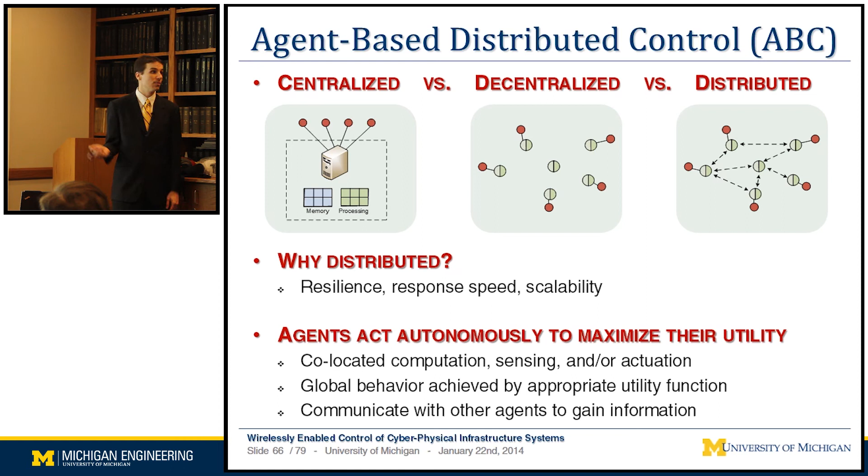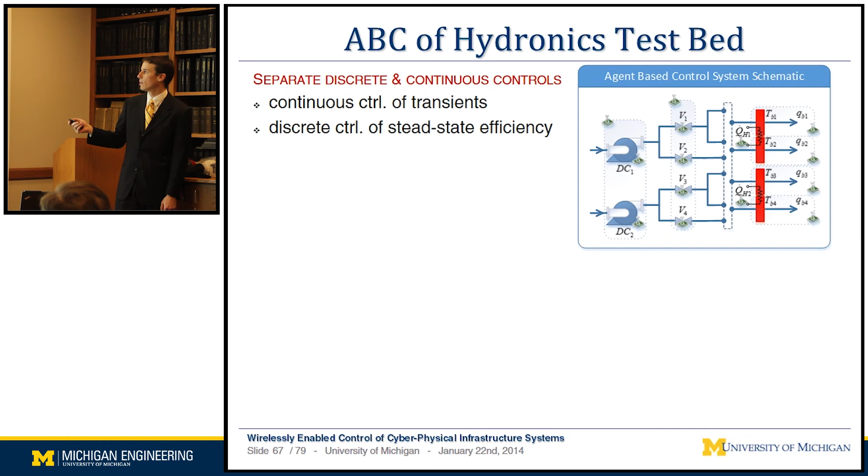So I've taken this agent-based framework and applied it to the hydronic system from the Navy application. Here you see that test bed down in the lab again, where we have a single agent controlling both pumps, a single agent controlling the 4 valves, and then 4 agents for each one of the thermal blocks, which are measuring the temperature and generating some sort of desired flow rate.

The first agent we'll look at is the thermal agent, which can be modeled as a timed automaton, where it just pretty much iteratively does this process — doing the MPC process at a fixed period of time. So this is pretty much just doing the entire MPC section that was previously presented, but it's agnostic to the supply side.

Here you see a complex supply side where you have 2 pumps and valves. Assuming a certain valve configuration, this block doesn't care how these 6 pipes get the water into it, but it has some sort of estimate of what power would be required for that. So what it does is generate a desired flow that it wants through its block.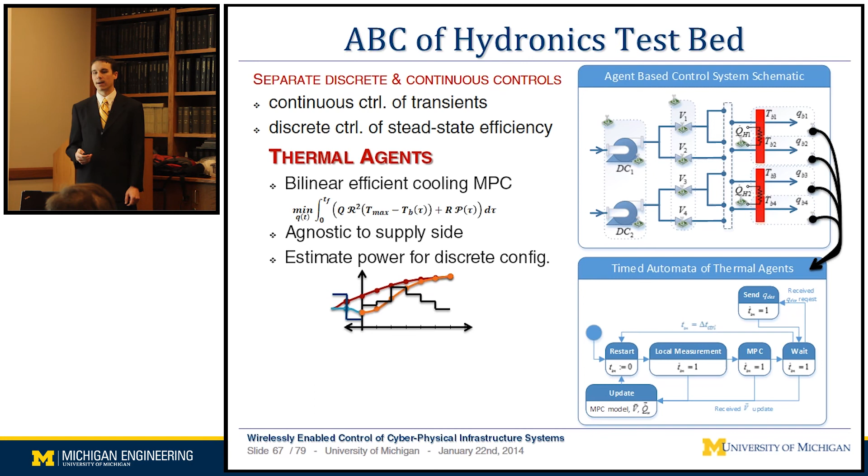Then there's a kind of balancing agent on the supply side — the thermal agents are the demand side, this is the supply side — where we once again have a timed automata model, and the agent is just requesting these desired flows from each one of the 4 blocks. Then it's solving a convex program to minimize pump power so that it meets the desired flow. So even if it can't necessarily get exactly the desired flow, it'll always get at least the desired flow in each one of the blocks.

So this flow rate is then algebraically related to duty cycle and then to pump speed.

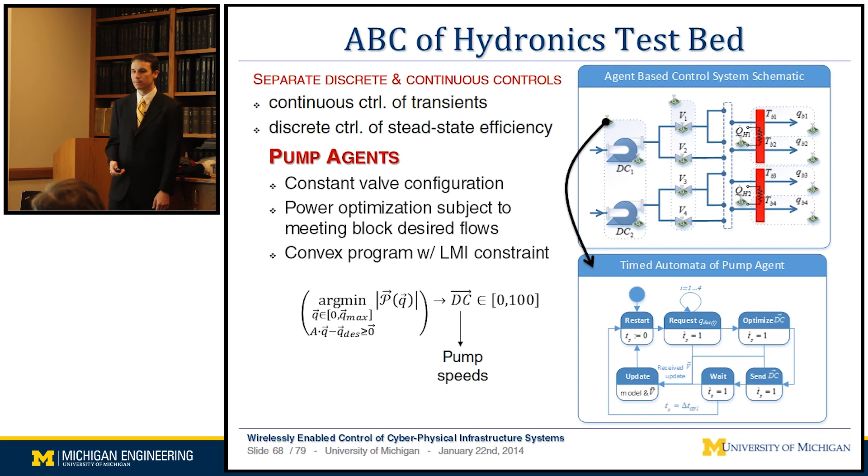And then we have, lastly, the valve agents, which really bring in the hybrid dynamics. So everything we saw previously was continuous control of the transients, assuming a discrete state. Then the discrete control of the valves is controlling for steady state efficiency.

So this agent-based control architecture was distributed in a series of martlets and applied to that Hydronics test bed down in the lab. And here we see the experimental results.

So this is a graph of the block temperature for each one of the 4 blocks. The black line is the measured value. The colored lines are the MPC trajectories, and they turn red as they move forward in time. We're reaching pretty close to our 40-degree set point, mainly below it.

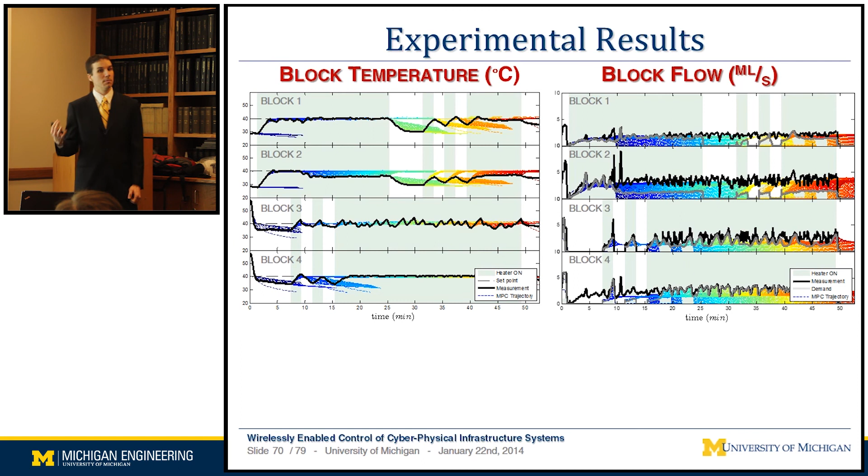And because the supply side has constraints, there's only 2 pumps, and we want to be able to get 4 flows exactly as what the blocks desired, we won't meet that, so we always just make sure we meet the desired flows. So the gray line is the desired flow, the black line is what was actually produced. And this is where some inefficiencies in this control architecture come up.

So the agents assume that so much energy in the entire system is being consumed as the integral underneath this area pretty much, but the actual energy consumed is the integral underneath the black area. So we've lost some efficiency in the agent-based abstraction because the agents weren't necessarily aware of what all the other agents were doing.

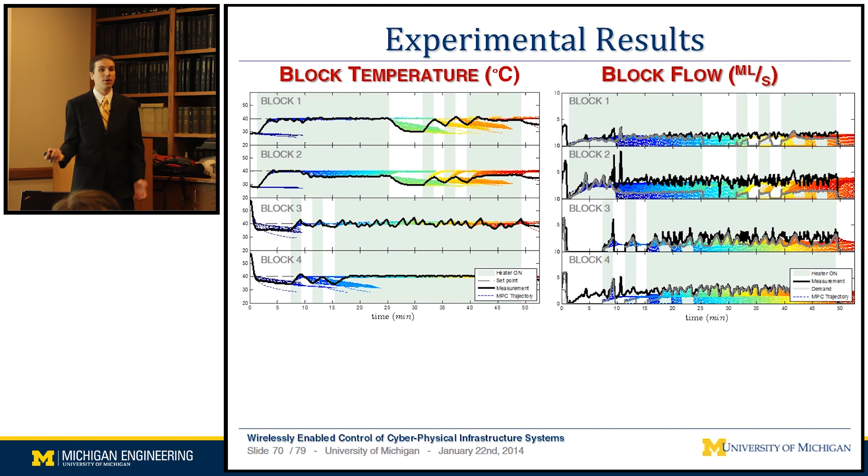So we have to really compare this because we know we're not quite optimal, but we still have to compare this against other benchmark controllers to see how we perform. So I've done that in simulation by comparing. This is experimental results, but the parametric study, the benchmark study, was done in simulation.

So I've compared it against bang-bang controllers and 2 other centralized and agent-based model predictive controllers that have a constant prediction history. So the MPC assumes that the control is constant over the open loop trajectory, so all of these colored lines would be horizontal - they wouldn't curve at all.

So there's some suboptimality in that constant assumption. And because each one of these has a different objective function, it's really not fair to compare what these controllers are doing to each other, because they're trying to do slightly different things. So what we do is compare all the apples and all the oranges and all the fruit kind of together. So here we see the minimum time objective - this is the amount of time spent above the set point.

The minimum time controller does a pretty good job at that, and the proposed controller kind of falls in the middle of the pack. For the previously published objective function, the proposed controller actually outperforms the other controllers on what they're trying to do, which is a pretty good result from the proposed controller, but it shows the suboptimality in the other controllers.

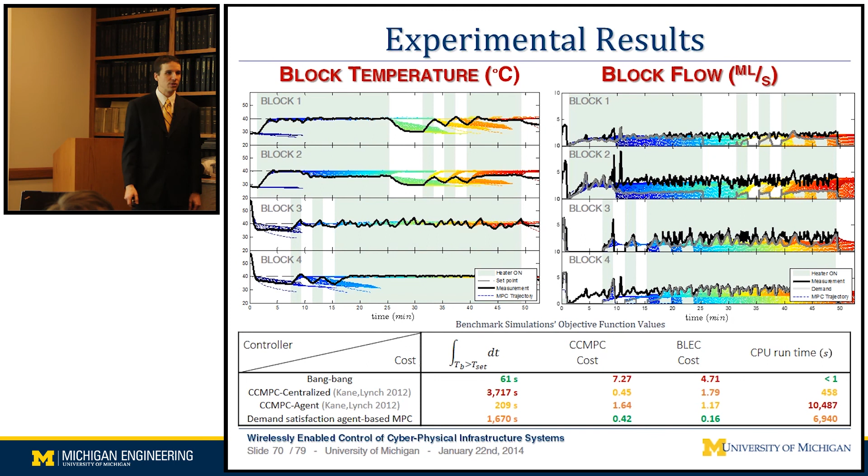And then here we see the bilinear efficient control, which is the objective function that the proposed controller is using, and it outperforms all of the other controllers pretty significantly on that objective function. And then with respect to computational complexity or CPU runtime, the proposed controller kind of falls in the middle of the pack and is much better than the other agent-based solution.

So to summarize this agent-based control architecture, it controls both hybrid and bilinear dynamics in a global complex control system. I've embedded this agent-based controller into a network of martlets to distribute the model predictive control problem.

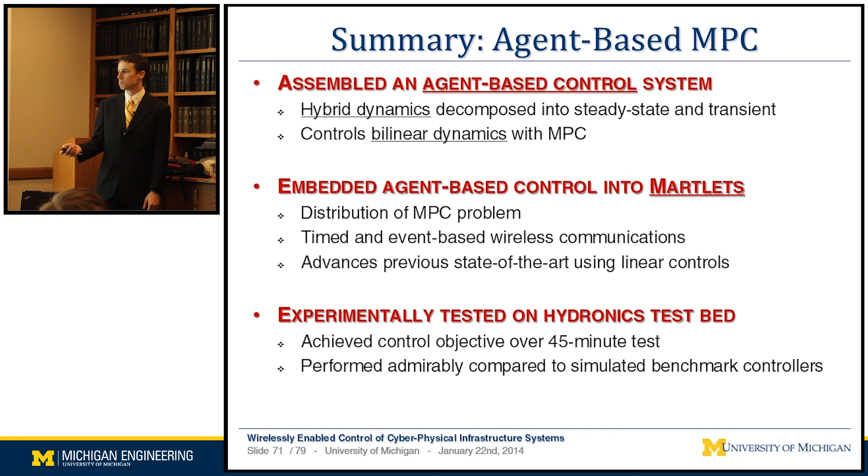And it has both timed and event-based wireless communications. This was experimentally tested on the Hydronic Systems test bed over a 45-minute long experiment of the block temperatures being turned up and down, showing that it performed well compared to all of the other benchmark controllers.

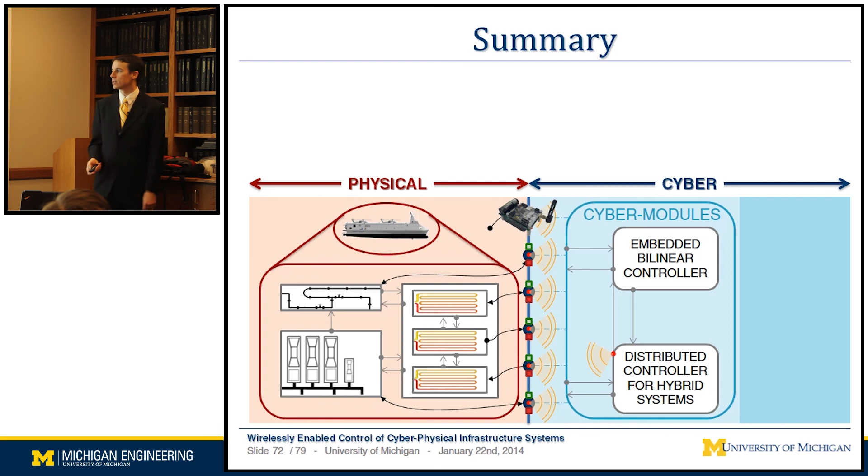So to summarize, this is the framework that I've been building on throughout this presentation. The very first thing I developed is I led the development of the Martlet wireless sensor, which introduces new realms for cyber-physical systems, because we have larger computational capabilities right at the nodes, and we still have communication between us.

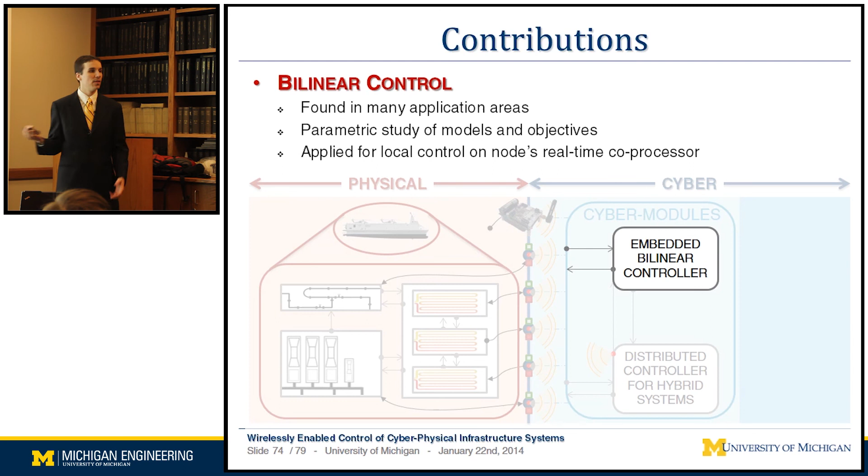The second development was mainly the parametric study of bilinear control systems, comparing them against different metrics that are important for distributing across these types of embedded controllers. Then this local control was distributed across a large-scale system that also exhibits hybrid nonlinear dynamics.

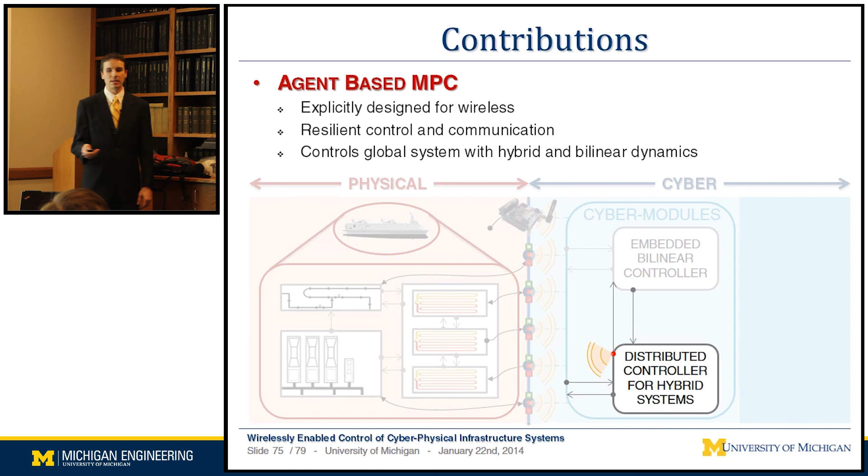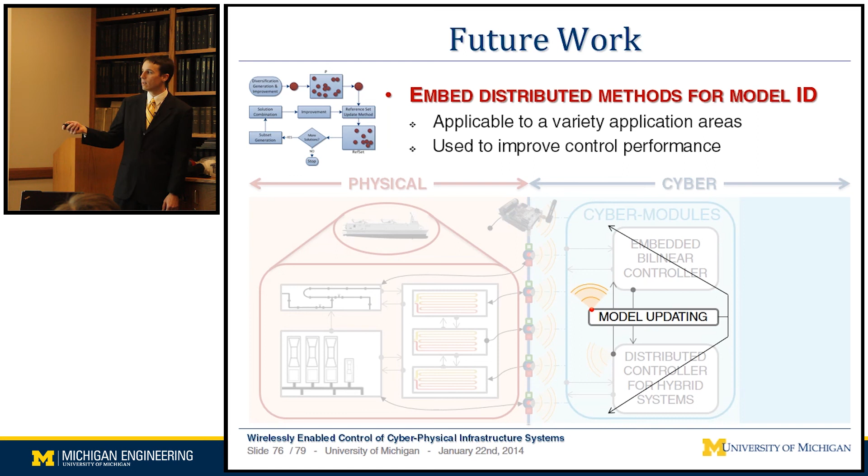This shows all of the developments I've made throughout my thesis work, but there are still definitely open areas. One of those is model updating. I've done a little work on this but haven't shown it. This is important because each one of these control architectures are model-based, so if we can improve the model by seeing how the system performs, we can update the models that these other controllers are using and improve the entire overall system performance.

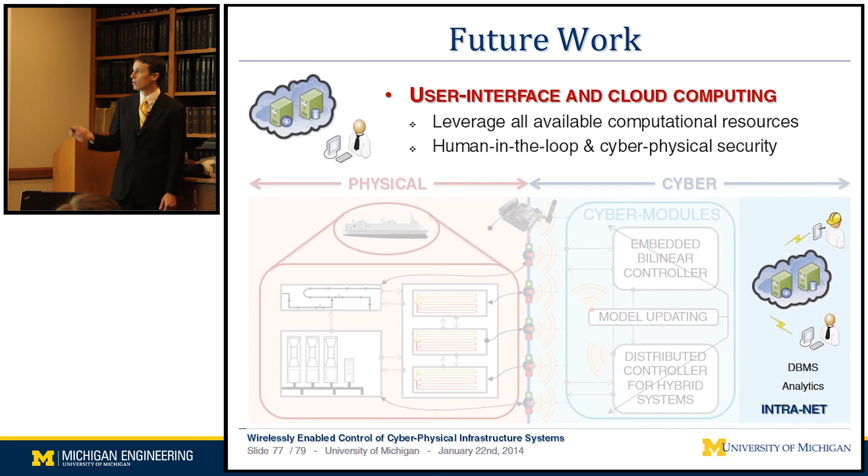Another opportunity for future work is on the intranet or computation that's further away, to really leverage all of the computing available throughout an extensive network and bring humans into the loop, or what's sometimes called cyber-physical social systems. And then also accounting for cyber-physical security, different ways these systems can be compromised.

Lastly, the future work of pretty much the entire CPS community is to create a unified science of all of this, to cope with the complexity and difficulty of predicting the behavior of these complex systems, and to generalize application-specific development. I've tried to do that with the bilinear system developments. Bilinear systems show up in many different application areas along with hybrid dynamics. So we're moving forward in this area, but there's still definitely a lot of work to be done.

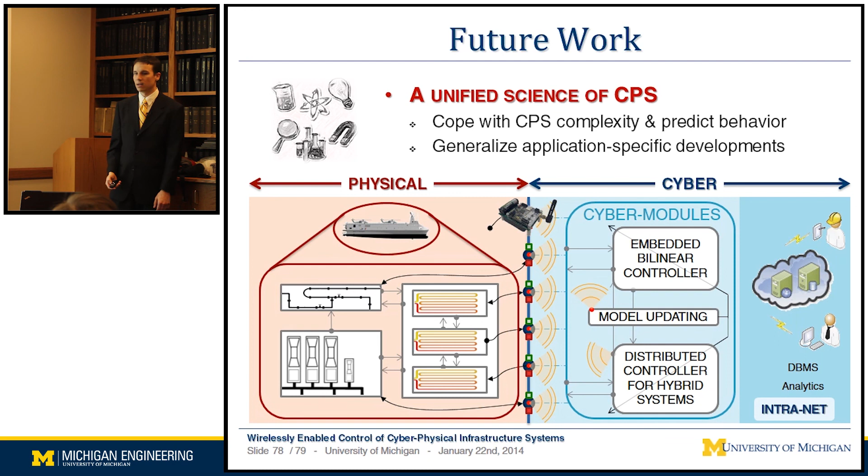To come back to what this work really means to do, it's to solve these global grand challenges of improving our urban infrastructure by applying these technologies in a smart way.